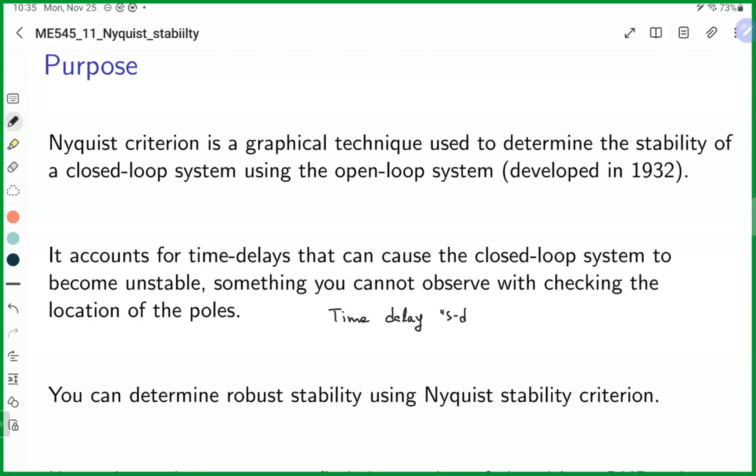The biggest problem with checking the location of the poles is that time delays are not approximated with poles. They are only seen as a phase shift. In the S domain, a time delay is represented by e to the minus sT, where we have a delay of T in the time domain. When we look at this e to the minus sT, if we take the magnitude of it, it's unity gain across all frequencies, because the magnitude of an exponential like this is unity.

But this will result in a delay, and this can cause instability. The main reason is that, let's say we have a phase delay of 180 degrees, we flip the sign from +1 to -1. Then when we feed this back, it becomes positive feedback. And positive feedback with a magnitude of 1 or higher is a guarantee for instability.

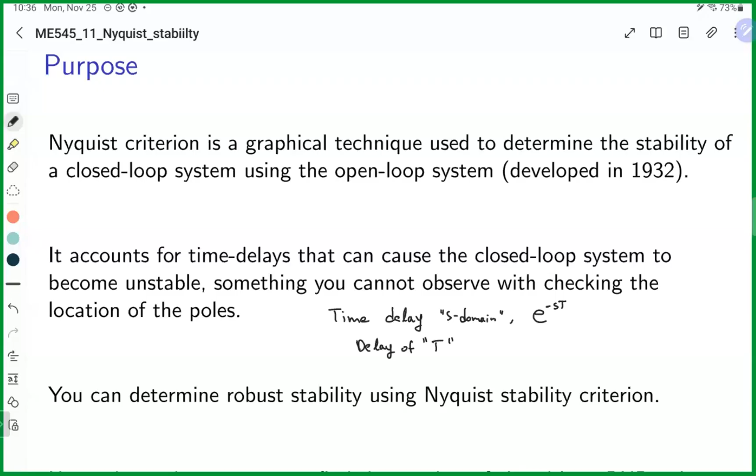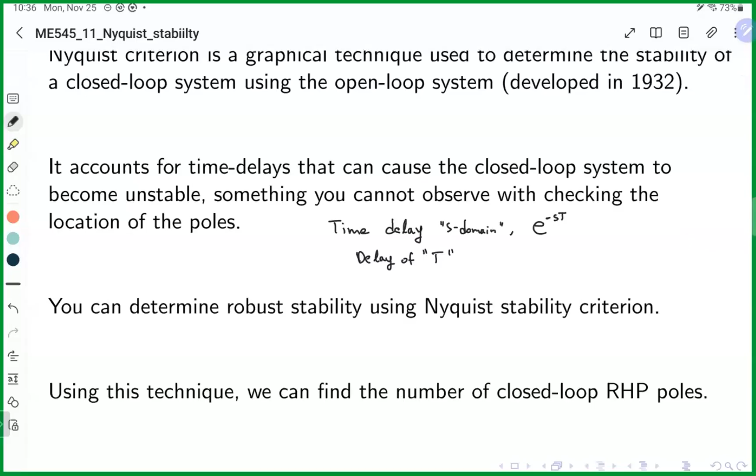So you can determine robust stability using the Nyquist stability criterion. What I mean by that is, with robust stability, how much modeling error can we account for, or how much guarantee do we have with modeling error before the system becomes unstable. So we don't have the perfect model. We can actually use the Nyquist stability criterion to determine how much uncertainty we can have.

And also finally using this, and this last one is a little bit dated. Because we have modern computers, we can just find the number of closed loop poles using computers, but this is a graphical way of finding the number of closed loop right half plane poles.

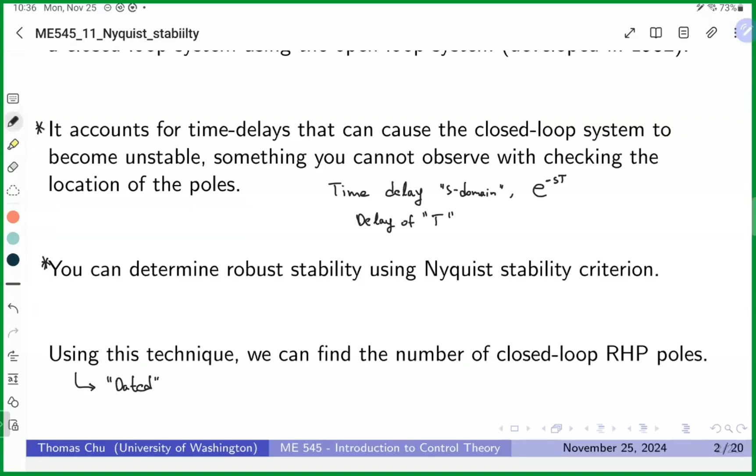I think the most important ones are these two points. The Nyquist stability criterion tells you how much time delay you can have and how much uncertainty you can have with your modeling. Those are the two main points.

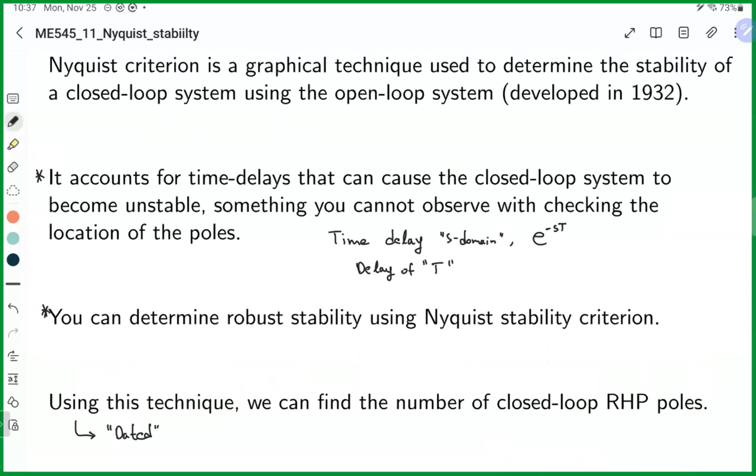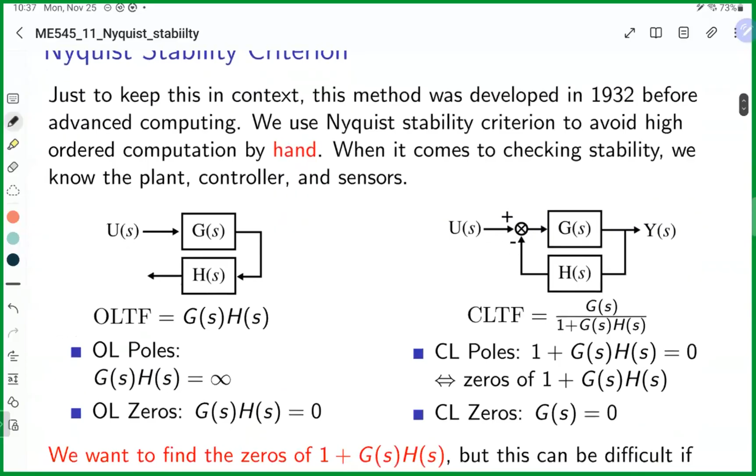So just to keep this in context, this method was developed in 1932 before advanced computing. So this is how people determined it back then. We use the Nyquist stability criterion to avoid high-ordered computation by hand. When it comes to checking stability, we know the plant, controller, and sensors. When we say plant, controller, and sensors, we're talking about the open loop system.

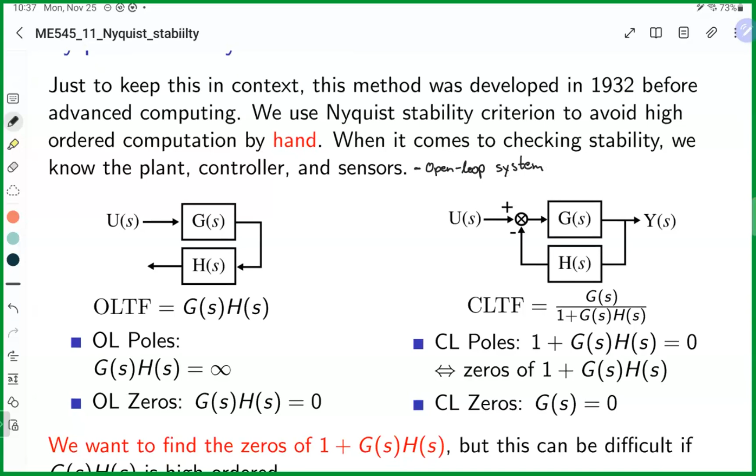So let's say we have a closed loop system. All closed loop systems have an open loop system where we don't close the feedback loop. On the left side here we have the open loop system, and when we close the loop, this is called closing the loop. We have our standard system. We're usually given our system on the right, and back then when people didn't have very powerful computers, they didn't want to calculate this 1 plus GH to find the poles.

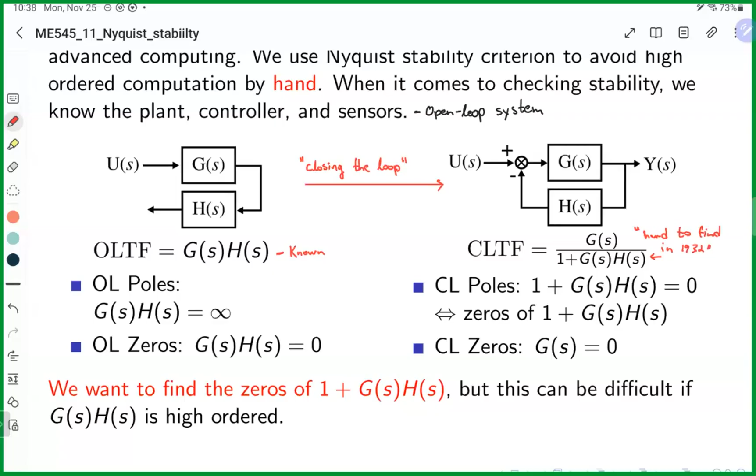This is something that is easy to calculate. This is known, and then this is hard to find in 1932. Basically, our open loop poles are where GH is equal to infinity, and the closed loop poles are the zeros of 1 plus GH. So when 1 plus GH is equal to 0, that's the closed loop pole of the closed loop transfer function. Also note that the open loop zeros, which is GH, are actually different from the closed loop zeros, which is just G, because if we look at the numerator, that's our difference.

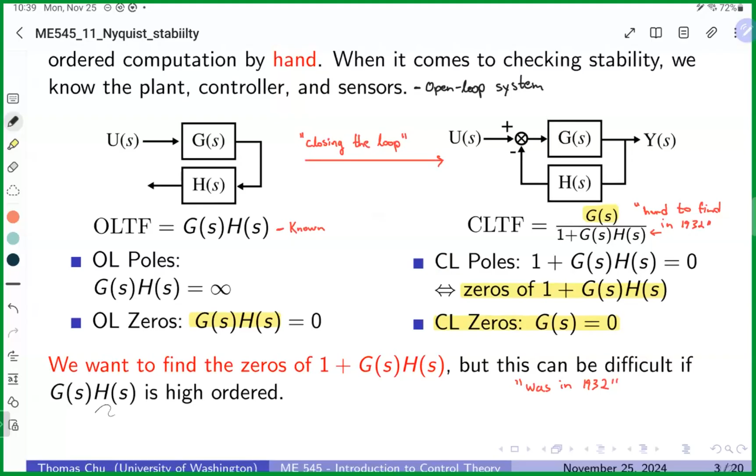So basically the goal is we want to find the zeros of 1 plus GH, but this can be difficult if GH is high ordered. Well, I really think it was difficult in 1932, so it's kind of moot now. We can't find the exact values of the zeros of 1 plus GH if we use the Nyquist stability criterion. Instead, we're just trying to figure out how many of them are in the right half plane. So we resort to something called mapping.

And that's what we are going to do. We're going to use a technique called mapping, and this is just a trick to determine the number of closed loop poles in the right half plane, or the zeros of 1 plus GH in the right half plane. So we're going to talk about mapping now. We're not going to talk about Nyquist stability yet, but about a technique called mapping.

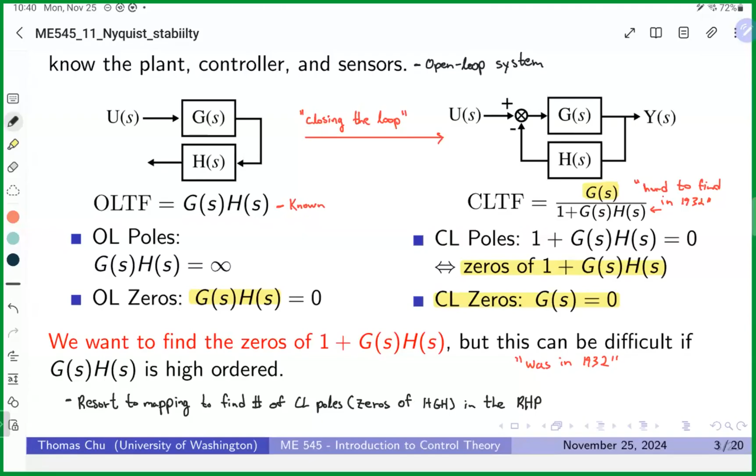The Nyquist stability criterion uses mapping, and I think it's better to show it to you through an example. I see mapping as taking points of S, points on the S plane, and when I say S plane, it's just that complex plane where we can pick any points of S, and they are plotted on the G of S plane. To be more thorough, we should say the G of S, H of S plane, because we're trying to include the open loop transfer function.

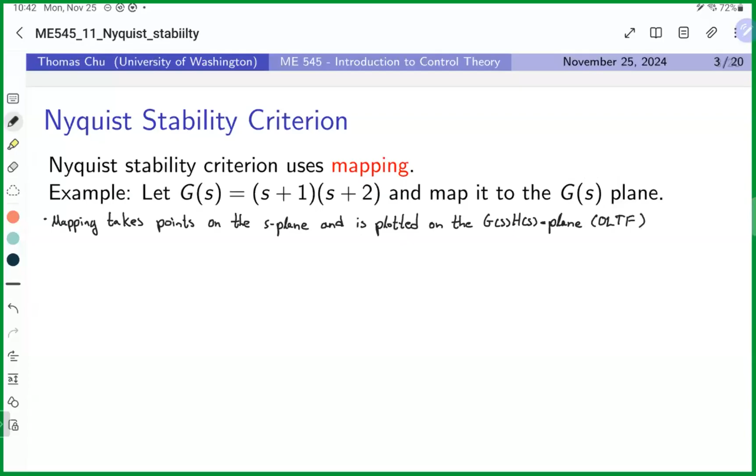So here we're going to assume that H of S is equal to 1. Then we get G of S, H of S. We're just going to expand this out now, and we get S squared plus 3S plus 2.

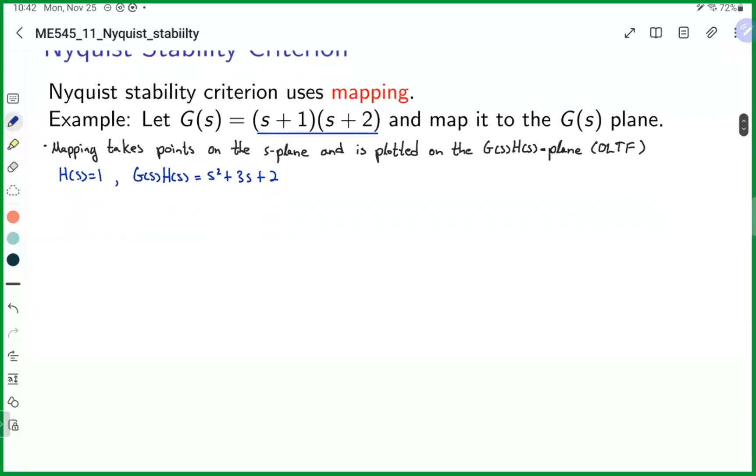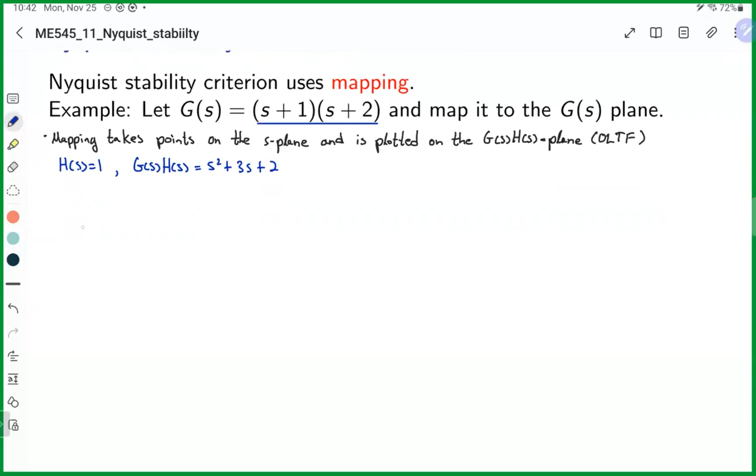So I'm going to draw this out now. I'm going to make a table on the left side, and I'm going to make two complex planes on the right side. Here I'm going to have points of S that we're going to evaluate, and then we're going to find those values, G of S, H of S, on the right half plane, or on the right column. We're going to have our S plane first, so points that we are evaluating at. And note that the S plane encompasses the complex plane.

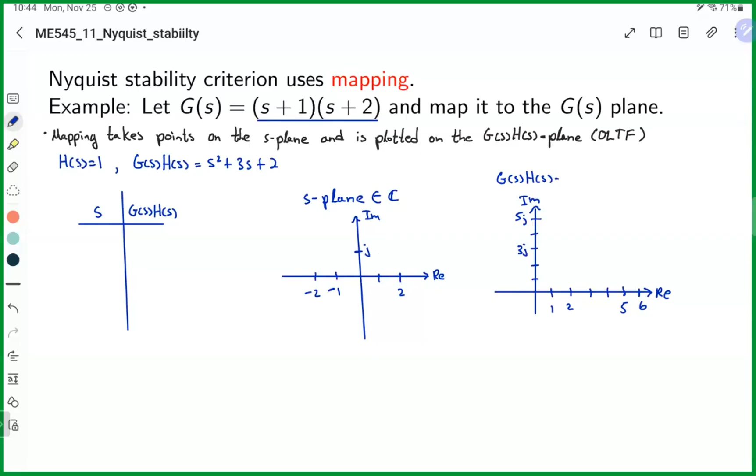And then I'm going to draw a GH plane. I'm going to bias it to have more points on the first quadrant just based off of my example. So I'm going to show quadrant 1 more. We're not going to have any other points in quadrants 2 through 4 in this example, but you can. And we're going to go up to 5, 5J, and 5 here. Oh, and we're going to have up to 6 points on the real axis. On the S plane, we're going to have from -2 to 2 for points that I'm going to plot. So this is going to be the G of S, H of S plane. And note that this is also in the complex domain.

Okay. So let's start with the first value, 0. When I plug S equal to 0, we just get 2. And this is what mapping is. I put S equal to 0, and I get 2 right here. This is called mapping. It's that straightforward. I'm going to tell you about the properties of mapping afterwards. But you just pick any values you want. There's an infinite number of values we can pick. So if I pick 1, I get 6, because 1 plus 3 plus 2 is 6. So then let me plot 1 and then I get 6.

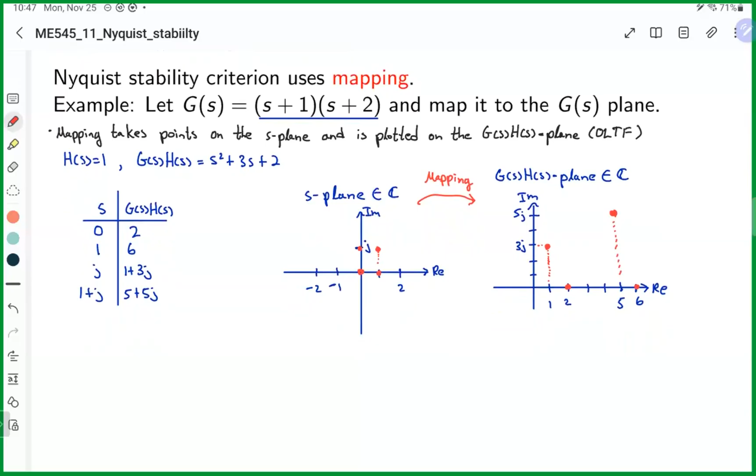So one property that we like about mapping is that magnitude and phase are preserved through mapping. What I mean by that is, let's say we were to find the phase and magnitude of GH at an evaluated point. So let's do this. Let's find the angle of G of J, H of J, and the magnitude of G of J, H of J.

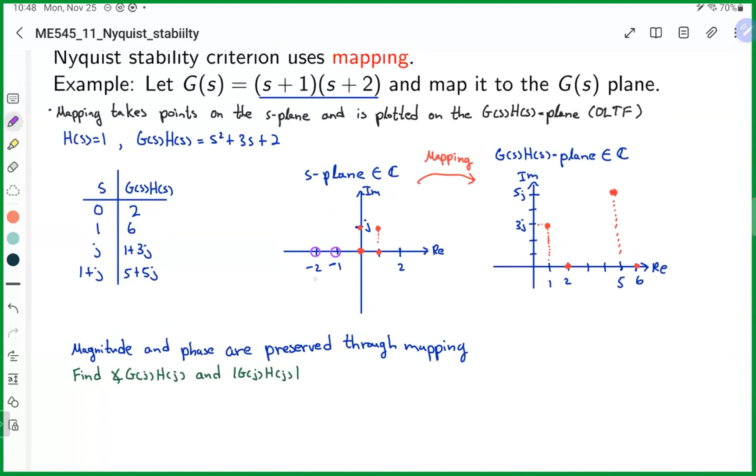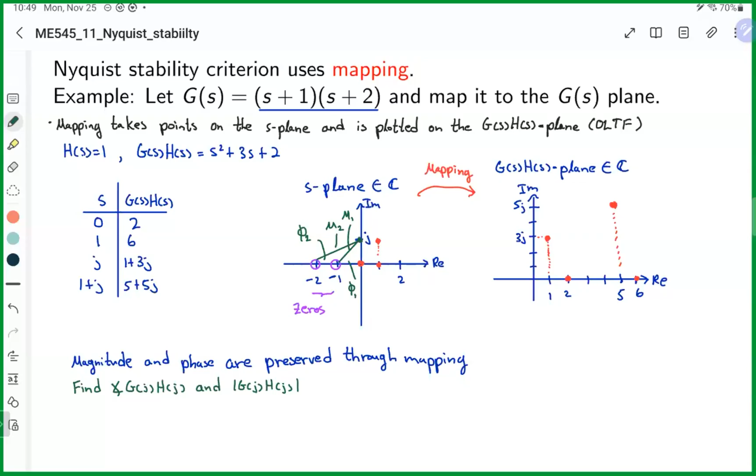So the way we would do it is this. We use the magnitude and angle criterion from the root locus. Here we have 2 zeros, one at -2, one at -1. So these are our zeros. And we take the value point here, which is J, and we draw our lines up to here. This angle I'm going to call phi1. This angle I'm going to call phi2. This magnitude I'm going to call M1. And this magnitude, sorry, I'm running low on space, let me flip these. This is going to be M1, that's going to be M2. So all we do is find the magnitude like we did in chapter 8. Kind of similar to what we did on the root locus. But this time we don't need to check if the points are on the root locus. We're just trying to find the magnitude and phase.

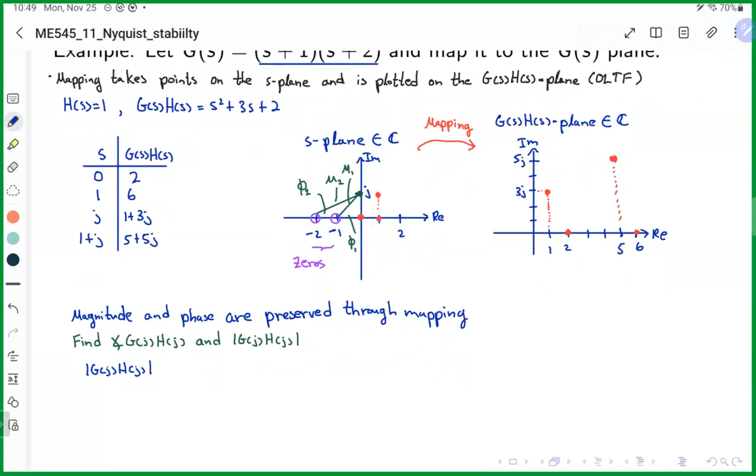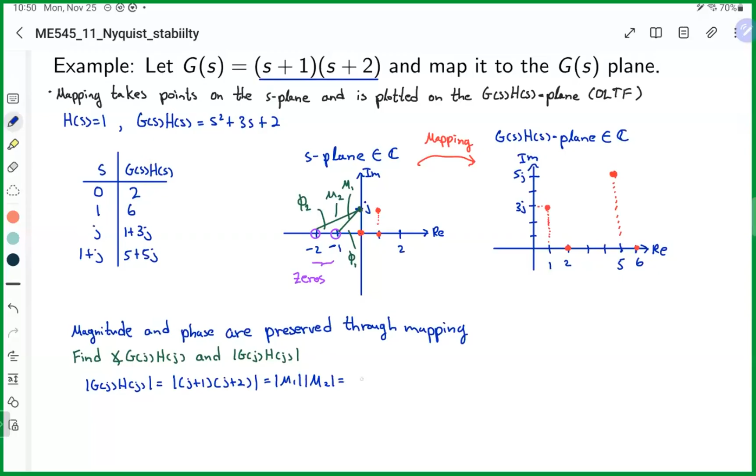So then we get this. We get the magnitude of G of J, H of J is equal to the magnitude of S plus 1 times S plus 2 at J, and that's going to be equal to the magnitude of M1 times the magnitude of M2, which is just equal to 3.16.

So we're just using the S-plane to find our magnitude right now. And then when we do the angle, it's going to be something similar, where we have the angle of G(jω)H(jω) is equal to the sum of the angles of the zeros minus the sum of the angles of the poles, which is equal to phi1 plus phi2, and we have no poles,

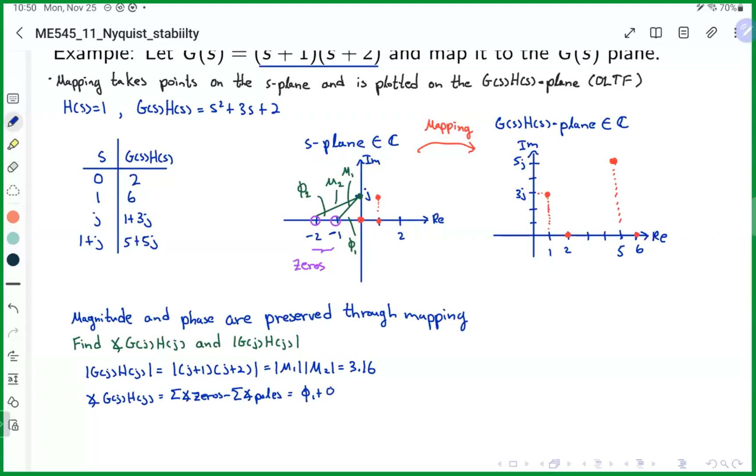where phi1 is going to be equal to arctan of 1 over, let's see, it's going to be our evaluated point, which is j, minus our zero location, so minus minus 1. And then phi2 is going to be equal to arctan of 1 over 0 minus minus 2. I actually don't have those numbers calculated, but I think this is 45 degrees. I don't have this number calculated, I think it's 26.6 degrees. I actually just have the final number, which is 71.6 degrees. So I think that adds up to 71.6 degrees. So this is nothing new.

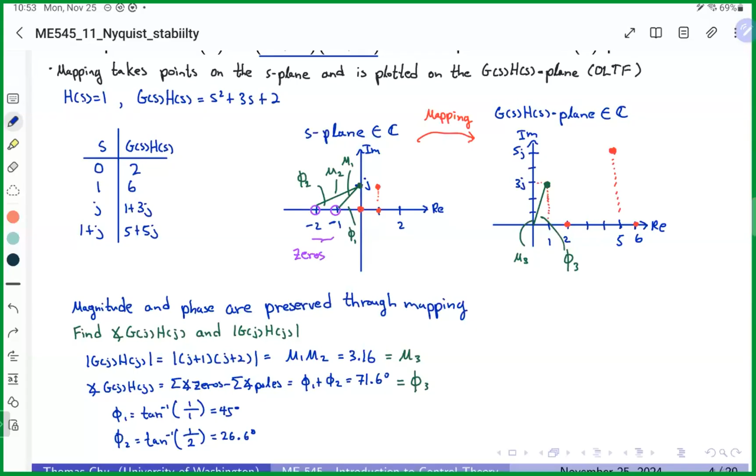Because on the S plane, what we're doing is taking the individual points from each pole and zero to our evaluated point, multiplying the magnitudes of the zeros divided by the magnitudes of the poles. And then for the angle, we do the sum of the angles of the zeros minus the sum of the angles of the poles. When we map this, we don't have to evaluate all those individual points. We're just evaluating the point from the origin to the new mapped location. We get that magnitude and we get that phase, and that's going to be the same. So phi3 is equal to phi1 plus phi2, and M3 here is equal to M1 times M2. So these are the same. We preserve this information.

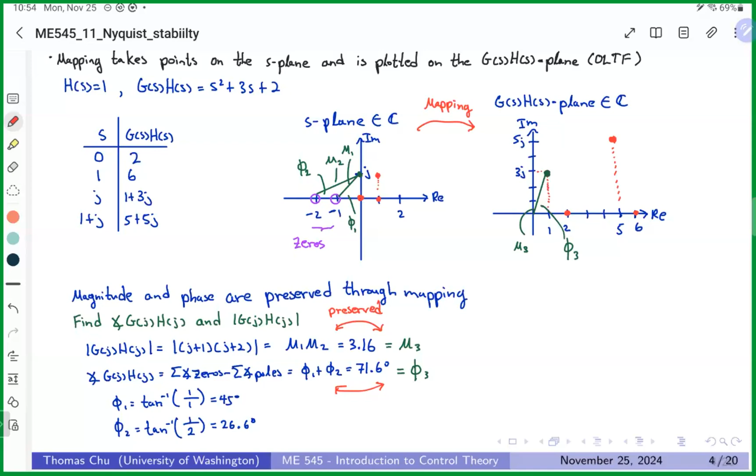Any questions? So this is what mapping is. So mapping preserves phase and vector information. In other words, the magnitude and angle information are preserved. And I guess steps for mapping are written out here. Mapping a single point: you just pick a point S, which has a real and an imaginary part. So you can pick a real, imaginary, or complex point on the S plane to map onto the G of S plane. I really need to update this. It should be the GH plane. And usually H is equal to 1.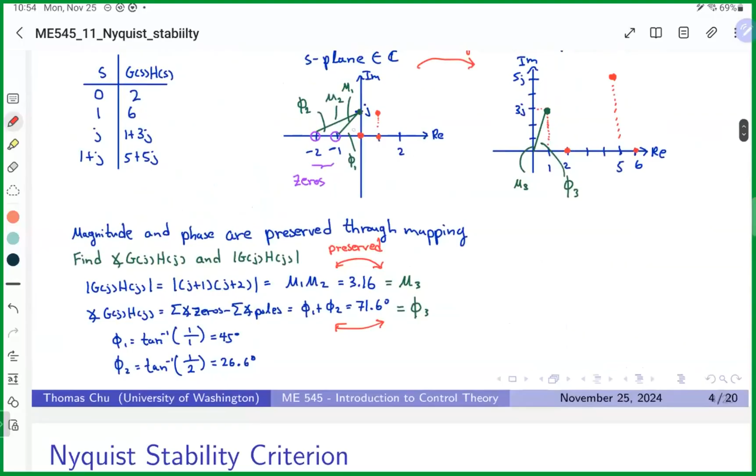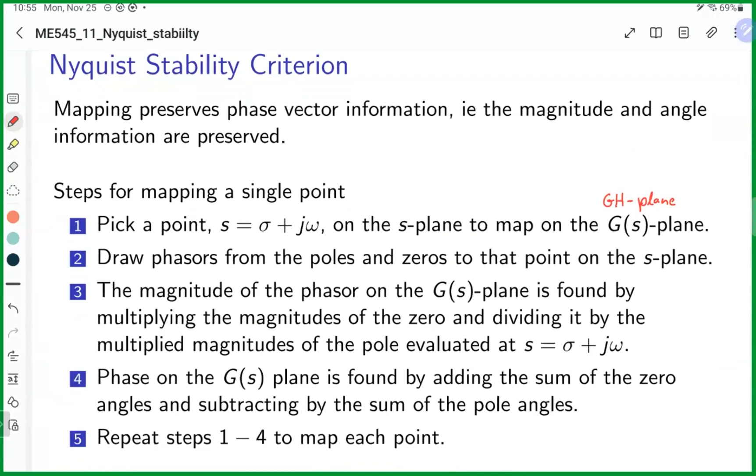We draw our phasors from the poles and zeros to that point on the S plane. So basically, I just draw this green line to that point. And then the magnitude of the phasor on the GS plane is found by multiplying the magnitudes of the zeros, dividing by the multiplied magnitudes of the poles, evaluated at that point. The phase is found by adding the sum of the zero angles and subtracting the sum of the pole angles. And then we repeat steps 1 through 4 to map each individual point.

So we can do another example, where we have a pole and zero. This one should be pretty straightforward. So we have our S plane, and we're trying to map 2J, and draw a map that's biased to quadrant number 2. Then we have our G of S, H of S plane. It's going biased towards quadrant 1 because that's where it maps to. I already have the value. It's going to map to 0.25 and 0.75.

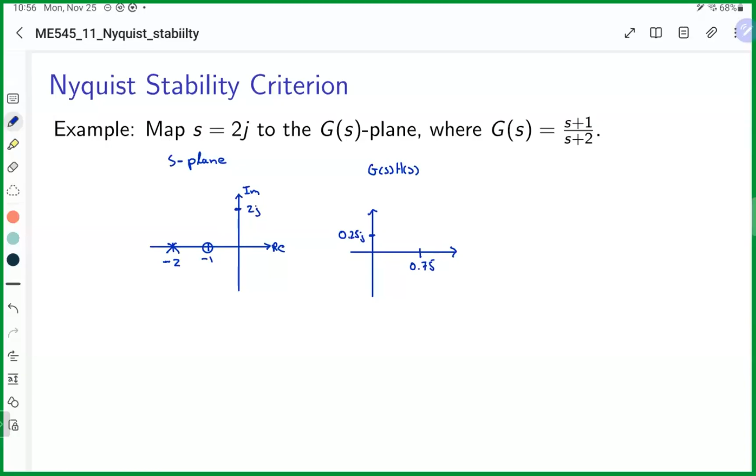So I have 0.25J, 0.75. Then here we're mapping 2J, and we have a pole at -2 and a zero at -1. So I'm going to draw my zero right here, my pole right there, map point right there. And then what I'm going to do is draw my phasors. Call this M1. Let me call this phi. Let me call this theta because that's our notation we've been using for our poles and zeros. And let me call this M2.

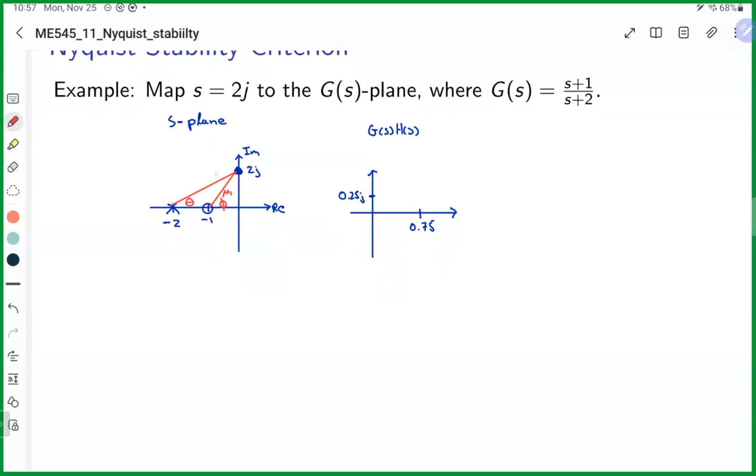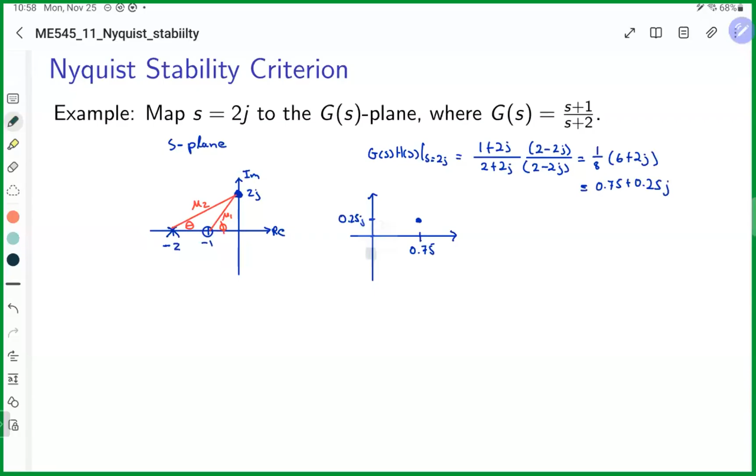So basically when we plug in 2J, we get this value of 1 plus 2J divided by 2 plus 2J. And then we just multiply the top and bottom by the conjugate of the denominator, which is 2 minus 2J, to get rid of the imaginary term in the bottom. And then I end up getting this value, 1/8 times 6 plus 2J, which is equal to 0.75 plus 0.25J. So that's where I get this map point right here. And my phasor going to this point, call this M3. I'm going to call this psi.

So then phi is equal to arctan of, here we can see it's our evaluated point subtracted by our zero location, which is going to be 2 over 1, which is equal to 63.4 degrees. Theta is equal to arctan of 2 over 2, which is just equal to 45 degrees. So using this, we can determine the angle. The angle of G of 2j, H of 2j is equal to 63.4 minus 45, which is equal to 18.4 degrees.

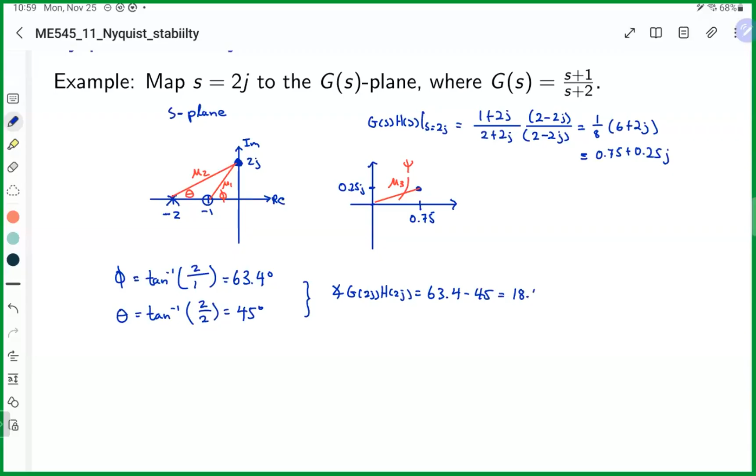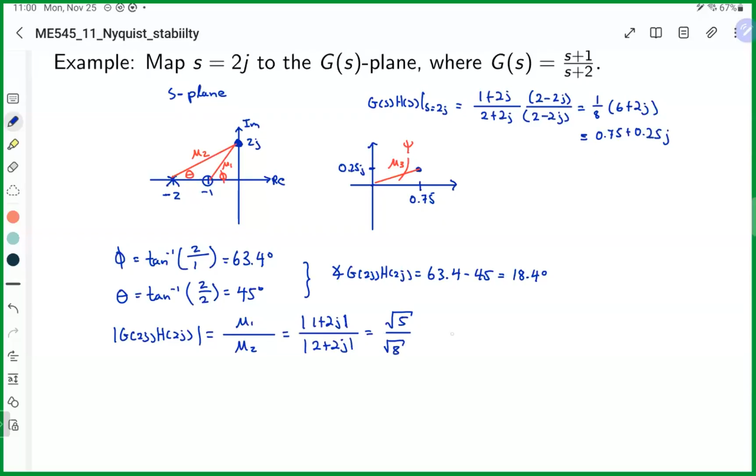The magnitude of M1. So actually, let's do this. The magnitude of G of S, G of 2j, H of 2j is equal to the magnitude of the zeros divided by the magnitude of the product of the poles, which is going to be M1 over M2, which is going to be equal to the magnitude of 1 plus 2j divided by 2 plus 2j, which is equal to square root of 5 divided by square root of 8, which is equal to 0.79.

All right. So if we were to check that, psi is equal to arctan of 0.25 divided by 0.75, which is equal to 18.4 degrees. And the magnitude of M3 is equal to the magnitude of 0.75 plus 0.25j. And we get 0.79.

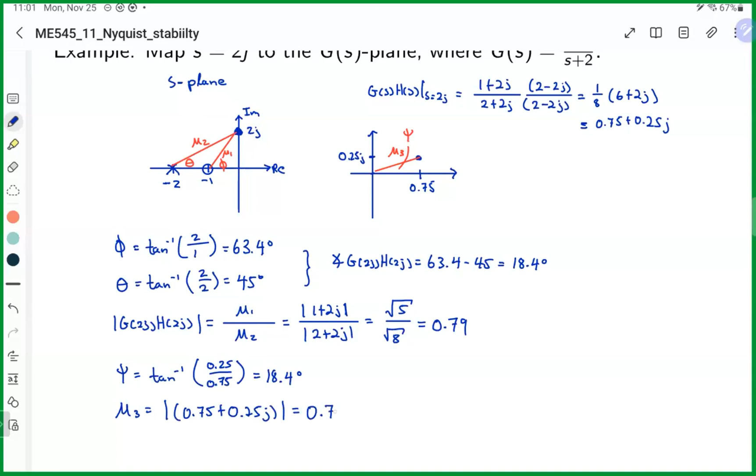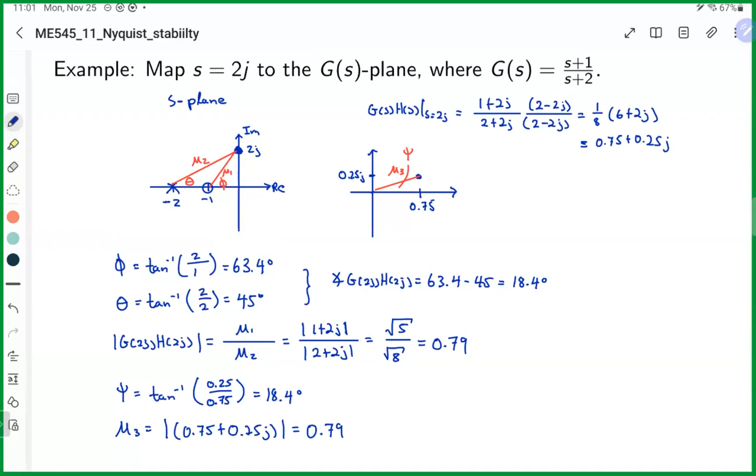All right, so it's a pretty straightforward example, but that's all to do one point. And with the Nyquist stability criterion, we're actually taking an infinite number of points, and that's not really feasible time-wise. So with the Nyquist stability criterion, when we're doing mapping, there's only going to be three main points we're going to be evaluating for, and I'll show that soon. I will want to talk about mapping shapes. So here are some general mapping properties.

So if I were to read this chart here, figures A, B, C, D, and E, there are five figures here. The left chart is my S plane, as you can see here. And on my right chart, it's the F plane, and they give you the function F. And you can see what it looks like when we evaluate all of these points along this contour. Basically, these are the points we're evaluating or mapping from. And we map it to this plane here, denoted by this circle here. Notice that these are closed contours.

So these are just some mapping properties where, let's say now we have a pole, and then we have the closed contour on the right. Note that there's an arrow here to note the encirclement direction. And this is important. You can see here we also have an arrow right there too. The encirclement direction for the contour is either going to be clockwise or counterclockwise. And one thing I want you to note is that for figures C, D, and E, what happens when you map a zero within the contour? So here we have an encirclement of a zero.

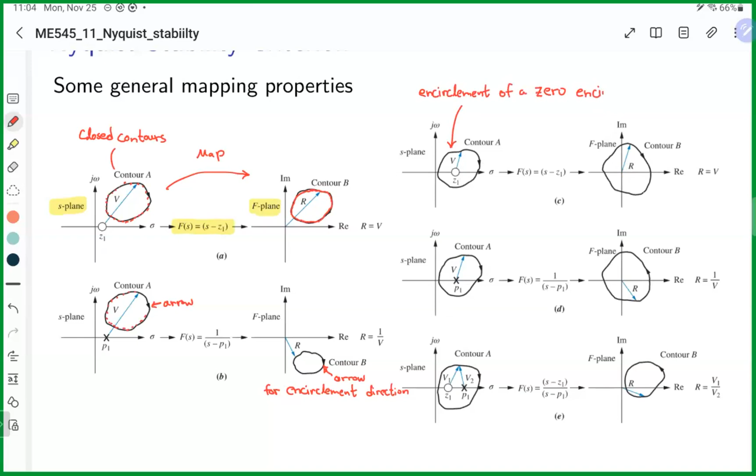And you see here, the origin is encircled. An encirclement of a zero encircles the origin on the F plane. So you see how the origin is encircled when you encircle a zero. It's the same with the pole. When we encircle a pole, we also encircle the origin as well. And this is a pretty important property for Nyquist stability.

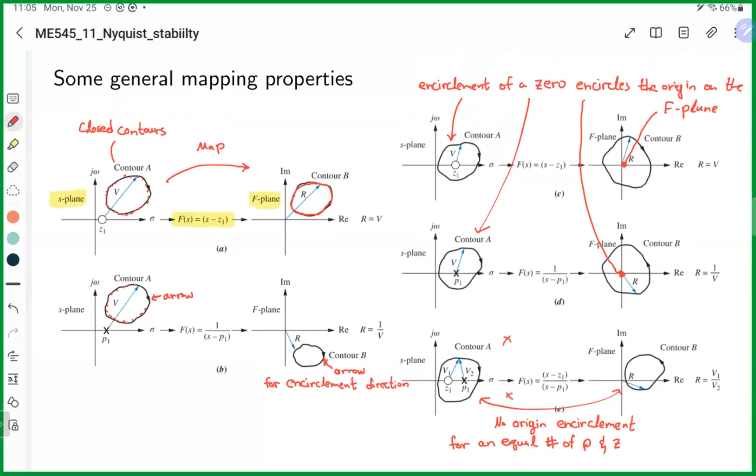All right, but this is where things also get weird: if we actually encircle a pole and a zero, there is no origin encirclement. And that's only when you encircle an equal number of poles and zeros. So if our contour encircles a pole and a zero, or let's say it encircles three poles and three zeros, then we will no longer encircle the origin. But let's say we have three poles encircled and one zero encircled, then you'll actually have encirclement of the origin.

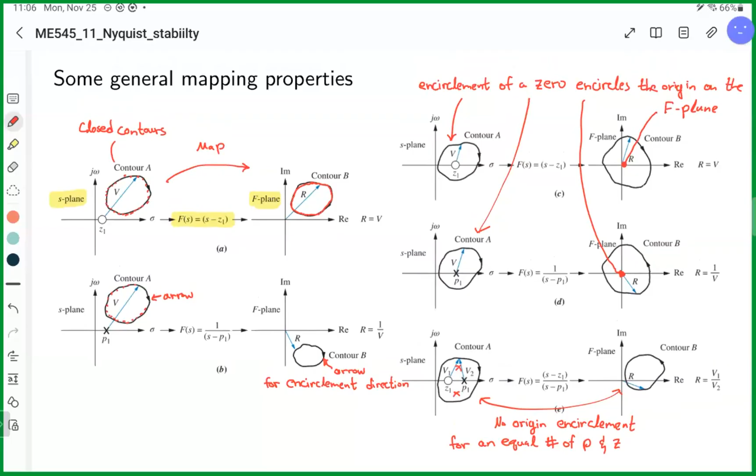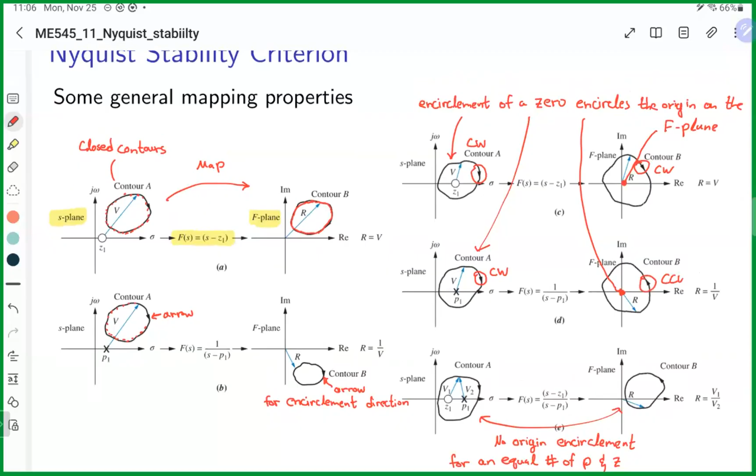One last thing I want you to note is the encirclement direction. So here, this is clockwise. And then here we have a clockwise encirclement. Here we have a clockwise encirclement. And then we have a counterclockwise encirclement. So I want to make a note about the encirclement direction as well. And this isn't as important, but this is a note on encirclement direction.

So if we look at figure D, D has a clockwise encirclement on the S plane, but a counterclockwise encirclement in the F plane. And this is only when you're encircling a pole within your contour in the F plane.

And the reason why is, so why does this occur? If we look at the angle of F, it's going to be the sum of the angles of the zeros minus the sum of the angles of the poles, which ends up just being the negative sum of the pole angles. So because of this negative number, the encirclement is going to go opposite of your contour. So when we go clockwise, it's going to go opposite because the angle's negative now.

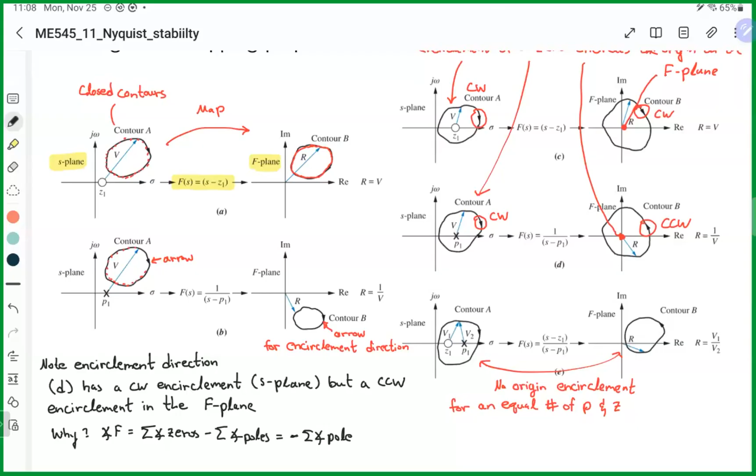I've only taught this once, which was in 2021, and I actually had people draw this out, or I drew this out in class, and this is why we're a week ahead. I hate drawing these out. Anyway, are there any questions? It's a lot of graphs to draw out.

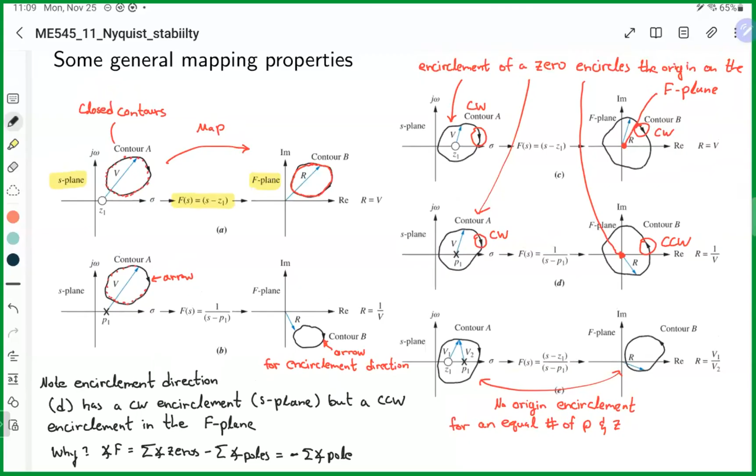So these are some general mapping properties. Now we're going to jump back to the Nyquist stability criterion. The Nyquist stability criterion uses mapping. It takes the following points on the S plane and maps them to the GH plane. Notice we're looking at the S plane again, and we're taking all of the individual points on this contour, which looks like a half circle. There's an infinite number of points, and we're mapping them to the GH plane. This has a radius of infinity, so it encompasses the whole right half plane of the complex domain.

So basically all points of S are on this boundary that I have. And this contour contains all right half plane poles, and specifically open loop poles and zeros. So any open loop poles and zeros in the right half plane are going to be inside this contour. Left half plane poles and zeros are not contained within this contour. And we want to map it to the GH plane, the G of S, H of S plane.

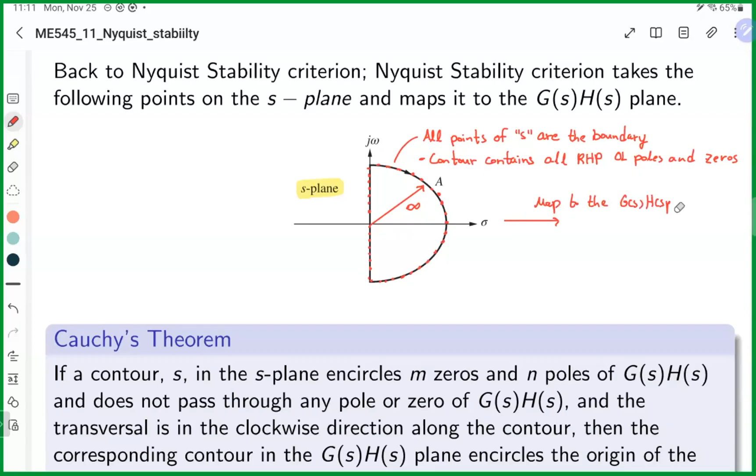Okay, so this relates to a theorem called Cauchy's theorem, where if a contour in the S plane encircles M zeros and N poles of G and H, and does not pass through any poles or zeros of GH, and the traversal is in the clockwise direction along the contour, meaning we're going this direction, then the corresponding contour in the GH plane encircles the origin of the GH plane N times. If I have a pole on the imaginary axis, the contour passes through it. We will have a special case for how we deal with that, but we're going to ignore that for now.

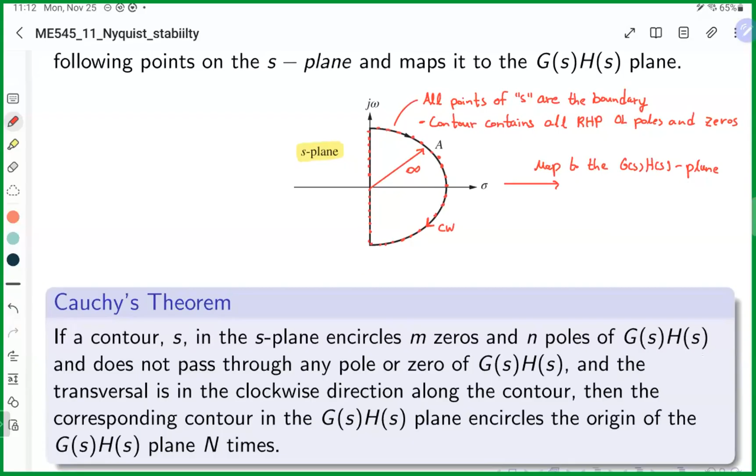Okay, so it's a lot of words, but I think examples and equations are easier to understand than a paragraph. Basically, this is what Cauchy's theorem states. The way we read this is, we have these two equations, and this CCW will tell you the direction of the encirclement, the number of encirclements in either the counterclockwise or the clockwise direction. Now, this Z here is the number of closed loop poles inside that contour. When I say contour, it's that infinitely big half circle contour. We want Z equal to 0 for stability, because if Z is any number, it means we have Z closed loop poles in the right half plane, since the contour encompasses the right half plane.

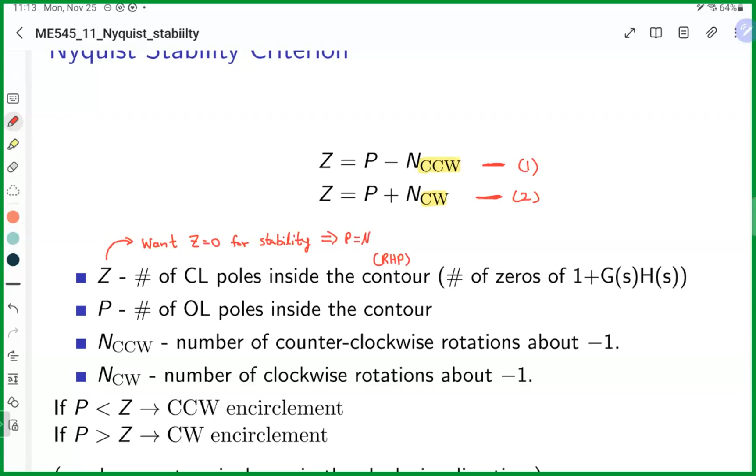So for Z to be equal to 0, we need P to equal N, N meaning N_CCW or N_CW. P here stands for the number of open loop poles inside the contour, which is something we can find relatively easily. N_CCW is the number of counterclockwise rotations about -1, and N_CW is the number of clockwise rotations about -1. And then here's a notation about when P is less than Z and P is greater than Z, and it tells you the encirclement direction. Usually we don't have to draw the contour, but I usually draw the contour in the clockwise direction. I'm not going to be mean and draw the contour in the counterclockwise direction for the exam. I'm just going to have it clockwise.

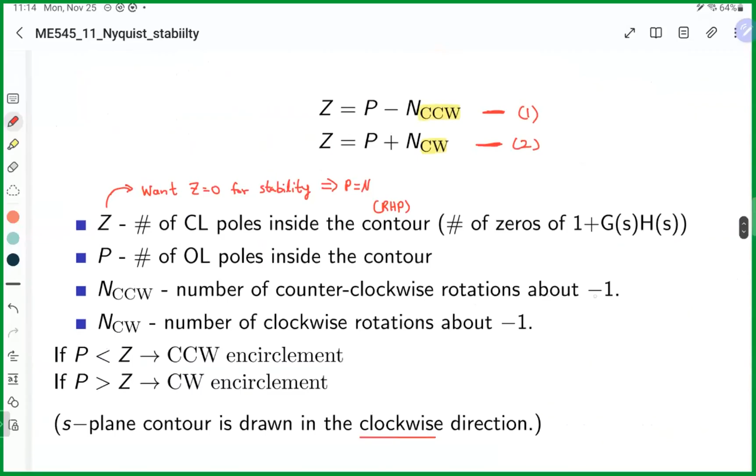So this is basically the Nyquist stability criterion. And then we're looking at encirclements about -1. I'm going to talk more about why we look at -1, but let me just give you the steps first. We just need to find key points. Our starting point is where we let s equal jω, where ω is equal to 0. We find that point and we map that point.

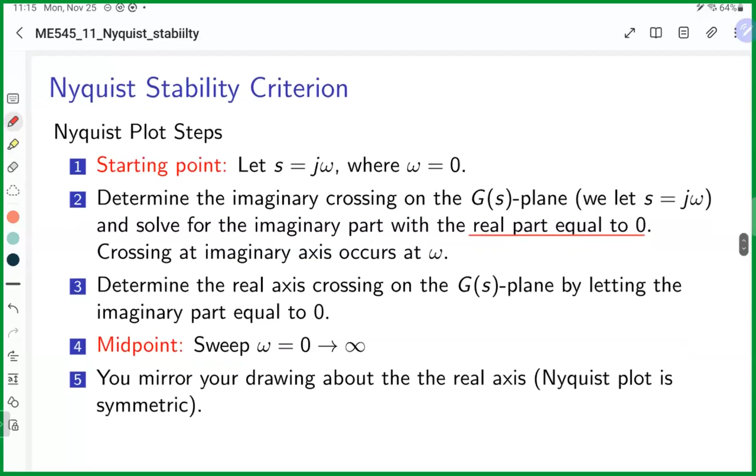Then we determine the imaginary axis crossing on the GS plane, where we let s equal jω and solve for the imaginary part with the real part specifically equal to 0. That's where the crossing at the imaginary axis occurs, at that ω. Then we determine the real axis crossing on the GS plane by letting the imaginary part equal 0 and only looking at the real component.

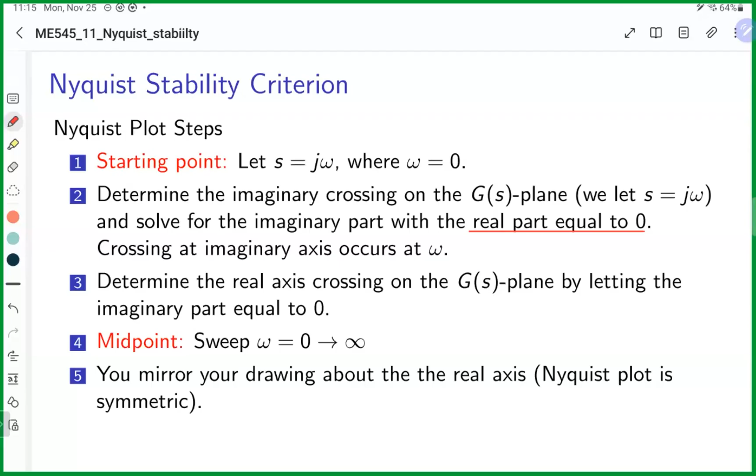And then we look for the midpoint by sweeping ω from 0 to infinity. Once we get the midpoint, we are actually done drawing our Nyquist plot. We just reflect it about the real axis because it's symmetric about the real axis. Again, we'll go through an example. It'll make more sense. And I'm going to end on this slide and show you on MATLAB

why mapping is useful. So we are mapping the plane GH, but are interested in the mapping of GH plus 1. The reason is that we're looking at the closed loop transfer function, which is G over 1 plus GH. But we're mapping GH. When we add 1 plus GH, we shift the whole plot to the right by 1. So our new origin is -1, and this is why we look at encirclements at -1.

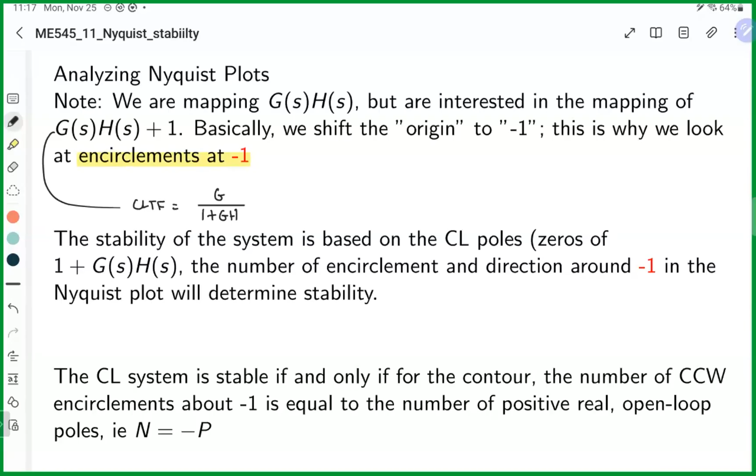And that's what Cauchy's theorem was talking about, or that equation I was looking at, on why we look at encirclements around -1. The stability of the system is based on the closed loop poles, which are the zeros of 1 plus GH. So we look at the number and direction of the encirclements around -1 in the Nyquist plot, and we use that to determine stability. The closed loop system is stable if and only if, for the contour, the number of counterclockwise encirclements about -1 is equal to the number of positive real open loop poles. In other words, N is equal to -P.

So this is how we analyze the Nyquist plot. For next class, I'll show you how to draw the Nyquist plot for a system with only poles, and then we're going to look at one with poles and zeros. And for the final homework, I'll probably add one or two Nyquist plotting questions where you have to plot it by hand, but then you can use MATLAB to check if your plots are good.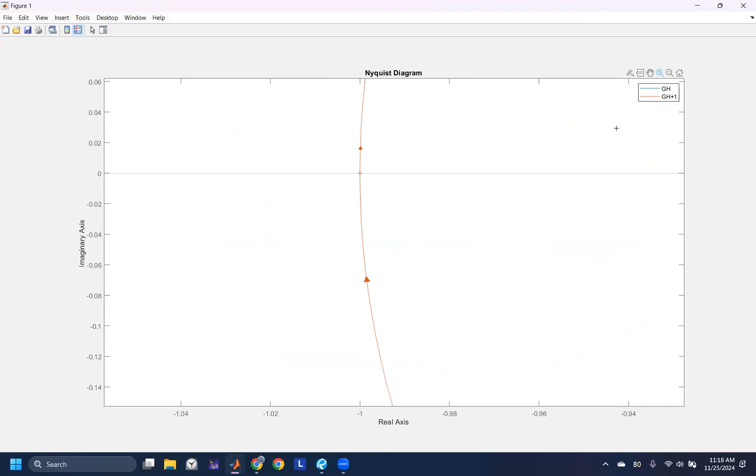The only difference is that when I add 1, I'm adding 1 to the real value, so everything is just shifted over by +1. Even though GH plus 1 will have different phase and magnitude information, the shape of this plot remains exactly the same, and it only moves over by 1. Now you can see we're looking at encirclements around -1. In the Nyquist plot of GH plus 1, we're touching the encirclement, and that's actually a case where we'll have marginal stability. When we have encirclement, it usually is unstable, but we need to look at the number of open loop poles in the right half plane as well.

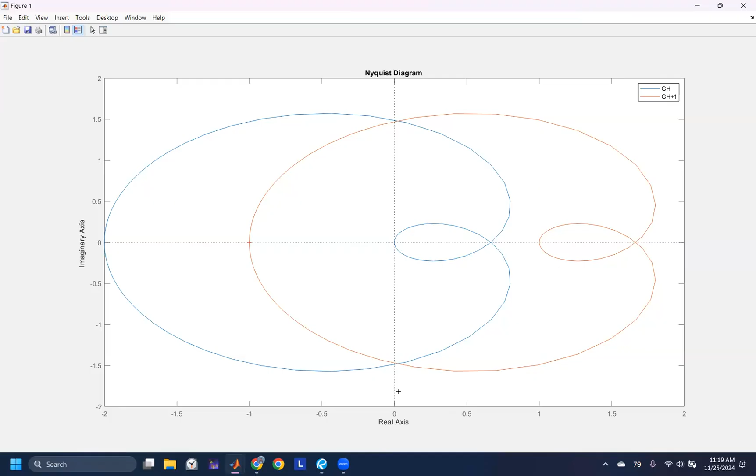So anyway, this is why Nyquist stability is useful. When we plot it, even though phase information changes, the shape remains the same. We'll pick this back up tomorrow and probably finish chapter 10 and basically the whole course tomorrow. All right, thank you.